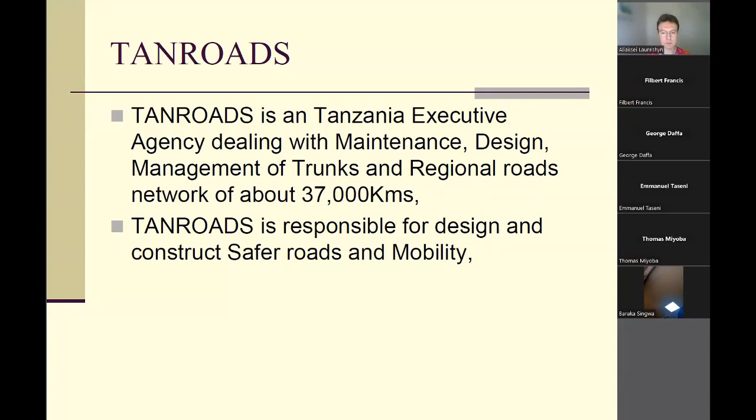Road safety manuals and guidelines that we are using for undertaking the audit in Tanzania: one is a guide to road safety audit established by the Ministry of Infrastructure Development in 2009. The second is the document established by African Development Bank manuals for road safety audit, established in 2014.

The AfDB manuals: one is for new road projects, which covers road safety audit stages 1, 2, and 3. The second document is for existing roads, proactive approach, conducted before crashes accumulate. The third one is for existing roads, reactive approach, identification and treatment of hazardous areas.

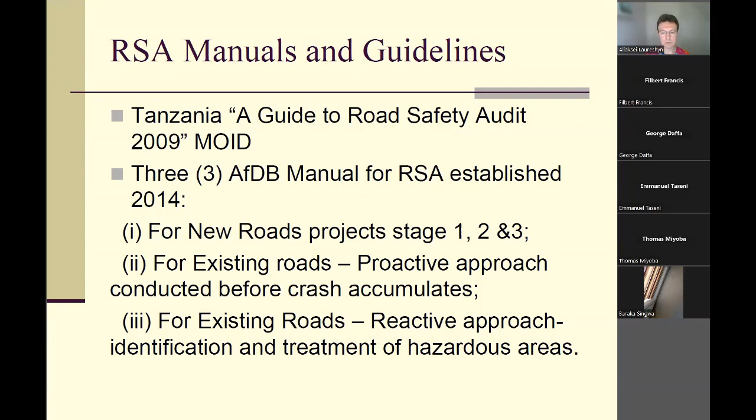Launch of road safety audit in Tanzania: the Ministry of Infrastructure Development prepared a guide to road safety audit. This document was developed after consultation with TANROADS. The Ministry instructed the road authority in June 2009 to conduct mandatory audit of all major road projects as per the guide to road safety audit.

The budget for undertaking implementation of road safety activities allocated in TANROADS is about Tanzania shillings 2.55 billion per year, distributed across all 26 regions. In Tanzania, we have 26 regions, and each region has a regional manager to control the network of trunk and regional roads in its area.

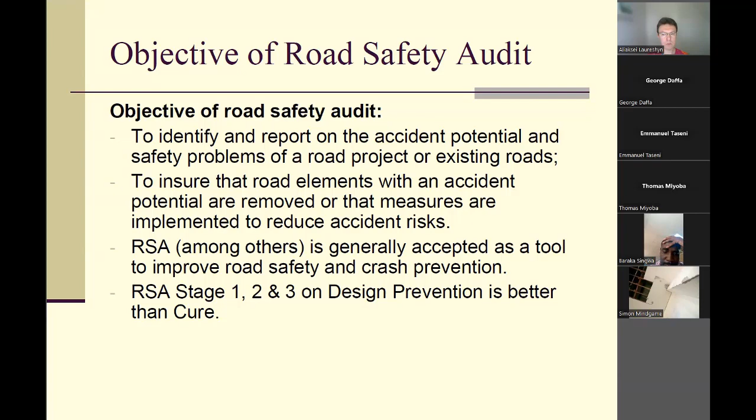Road safety audit stages 1, 2, and 3 are based on the principle that prevention is better than cure. These stages mean you are doing the audit on the design drawings, changing the lines in the drawing before construction starts. It's much easier to change a line in a drawing than to demolish an already constructed road.

Stages we conduct for road safety audit: according to the guide to road safety audit, there are 6 stages. Stage 1 is during the feasibility study stage, the first stage where we do the audit.

Stage 2 is during the preliminary design stage, where you check the drawing, the road signs, the junctions, the roundabouts, every component that is in the drawing.

Stage 3 is the road safety audit during the detailed design stage. At this stage, all road signs, road marking schedules, and bus bays are shown in the drawing, and you have to check if everything is okay.

Road safety audit stage 4 is on road works. During road works, a lot of accidents happen, so you have to go to the construction site to check if the contractor adhered to safety measures, ensuring temporary road signs and other information signs are in place.

Stage 5 is the pre-opening stage. At this point, road construction is completed, road signs and markings are in place, but the road is not yet open to traffic. That's why it's known as pre-opening, the road is completed but traffic is not yet using it, and that's when you do the audit stage 5.

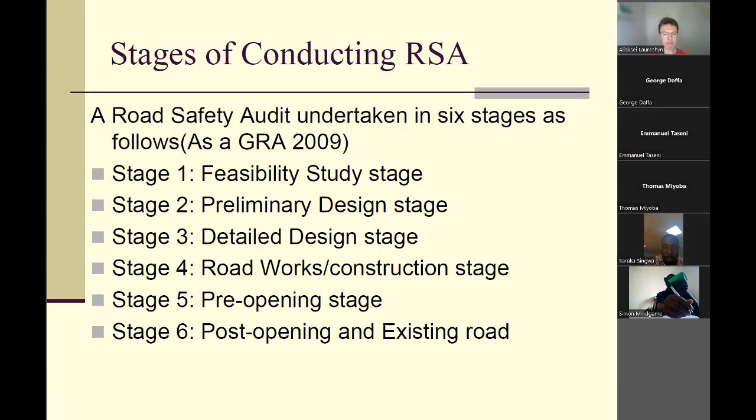Method that we are using in undertaking the road safety audit. We, as the road agency, have three methods that we are using in undertaking the audit.

The first method, we use the in-house capacity. If there is no enough money, we just coordinate ourselves, taking one road safety engineer, one design engineer, one maintenance engineer to do the audit in-house because there is no money to hire an independent consultant. But this method has got a conflict of interest because we are the client. If you are the client, you own the roads and you are doing the audit. So this method, although it's cheaper, has got a conflict of interest.

The second method that we are using is to hire an independent consultant. It needs a larger budget, it's expensive, and it takes time to procure the consultant, so you have to do procurement to get the consultant. Mainly for all donor-funded projects, AfDB projects and World Bank projects, we have to hire the independent consultant to ensure that there is no conflict of interest.

The third method that we are using is to put in the terms of reference that the designer for the road include a road safety engineer in his team to do the audit. So the client may include road safety audit in the contract of the designer, at road safety stages 1, 2, and 3. This is cheaper and faster, but also has a conflict of interest because the designer is the one who makes the drawings, so if he is the one auditing his own drawings, that creates a conflict of interest.

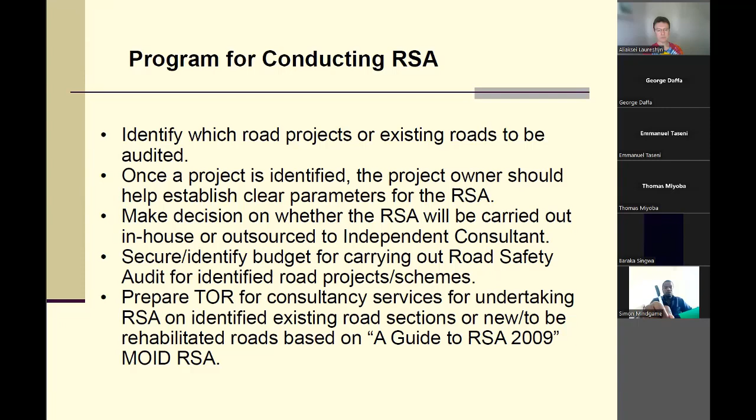While road safety audit is necessary, compliance with design standards does not guarantee safety. You can see a road which is very straight, 10 kilometers, but accidents always happen there. What is the problem? The radius of curvature is okay, every highway component geometry is good and it complies with the design, but accidents always happen. That's why I say that compliance with design standard does not guarantee safety.

Road safety audit helps sensitize highway engineers to safety issues. Feedback from road safety audit may lead to improved design standards. So if a highway engineer designs a very straight road, he may say this is geometrically okay. So sometimes the highway engineer, you have to teach them how to do the audit.

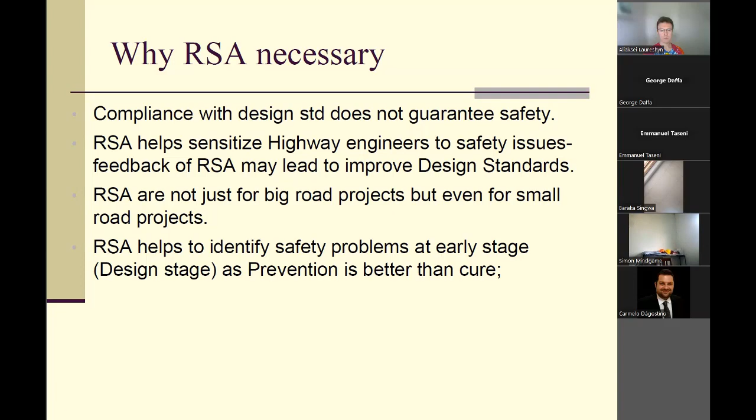Road safety audit is not just for big roads, but also for very short, small road projects, especially in urban areas. Maybe there is just a 4-kilometer road, but accidents happen every day, so you have to do the audit to check what the problem is. Road safety audit also helps you identify safety problems at an early stage, at the design stage, as prevention is better than cure.

Involved parties on road safety audit. The parties involved in the road safety audit are the audit team - an in-house audit team or independent consultant composed of safety specialists commissioned by the client.

The second party is the designer, the design team, which is the party responsible for the design and will be asked to alter the design to incorporate the recommendations.

The third party is the client. The client is the owner, like TANROADS, the owner of the road who gives consultant services to the audit team. So we have these three parties, and the client is the one who decides to accept or reject your audit recommendations.

Next, undertaking the audit. Team members study the project during the undertaking of the audit. Each member studies the project reports and drawings independently, then comes together for a site visit for road safety audit stage 1, 2, and 3.

If this road safety audit is at the design stage, you may have three roles: the highway engineer, road safety engineer, and maintenance engineer. Everyone should review the drawings independently, then visit the site to see what the problems are.

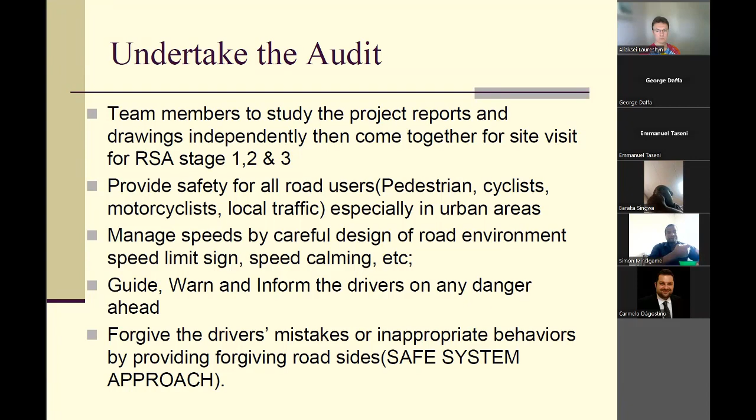Forgive the driver's mistake - drivers always make mistakes, but you have to design so that even if an accident happens, the impact will be very low. You have to consider forgiving drivers' mistakes or inappropriate behavior by providing forgiving roadsides, or use the safe system approach.

Next, road safety audit reporting and documentation - a checklist for audit reports. In the reporting, you put the introduction details of who requested the audit, and you have to show in the report the names of the persons in the audit team, mentioning their names and each profession.

Drawings and documents submitted - you also have to list the type of documents that have been provided for review. Constraints - if there are any constraints, you have to mention in the report, for example if there are no signing plans available, maybe one document was missing during the execution of the audit.

When the audit was done, you have to put the dates and times of the site visit. Sometimes you have to visit the site during the night because maybe an accident in that area happened at night, so you go to check what the problem is, maybe visibility problems.

Date of meetings - if meetings are held with the client and designer, you have to mention the dates and attach the attendance register of those who attended. The technical terms used in the report also have to be shown.

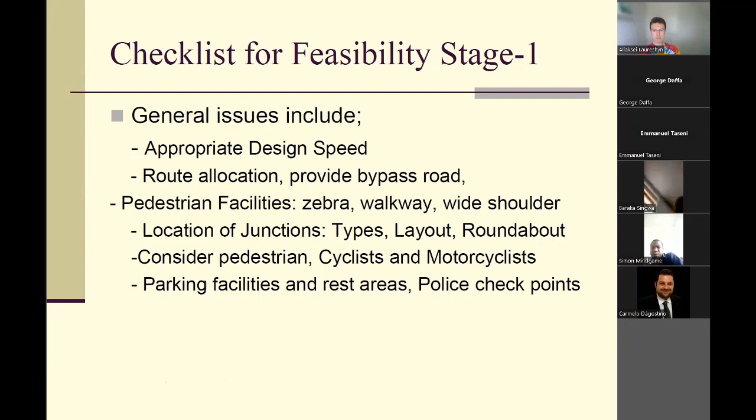Next, checklist during road safety audit stage 2, preliminary design. What factors are we checking? These issues: appropriate design speed, stopping sight distance, roadside features, drainage.

You have to check the bus bay, side slopes, horizontal alignment, horizontal and vertical curves, and consider visibility, the new-existing road interface.

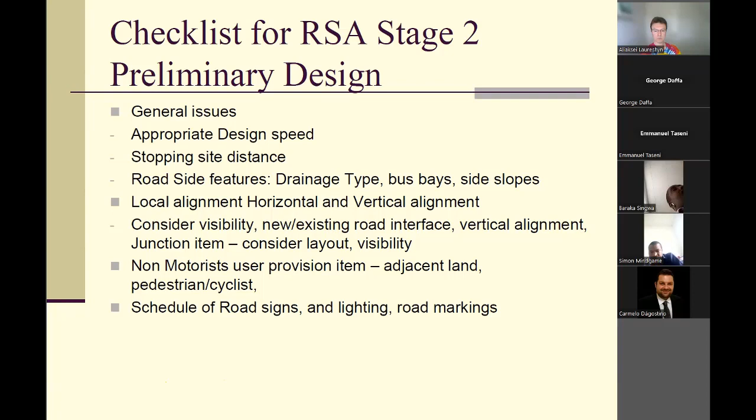Check junctions, non-motorized user provisions like pedestrians and cyclists, and check the schedule of road signs, lighting, and road markings.

Next, checklist for road safety audit stage 3, detailed design. You have to check what we are checking during the detailed design.

The factors include appropriate design speed, pedestrian facilities, roadside features, drainage, schedule of road signs, traffic signals, markings, horizontal alignment, visibility, junctions, safety, guardrails, and roundabouts. These are the factors checked during the detailed design.

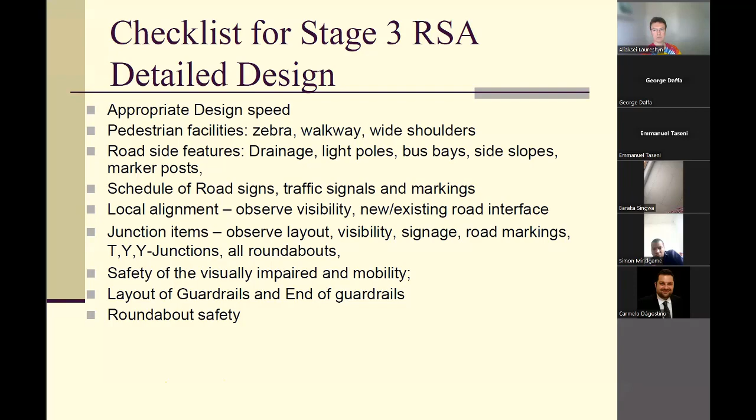Design safer junctions. During the audit of the design, you have to check these issues. No crossing roads: if you put crossing roads, you increase the conflict points to 32. Good approach visibility: this visibility is very important in junctions. Speed of vehicles is controlled: when vehicles are approaching the junction, you have to reduce the speed.

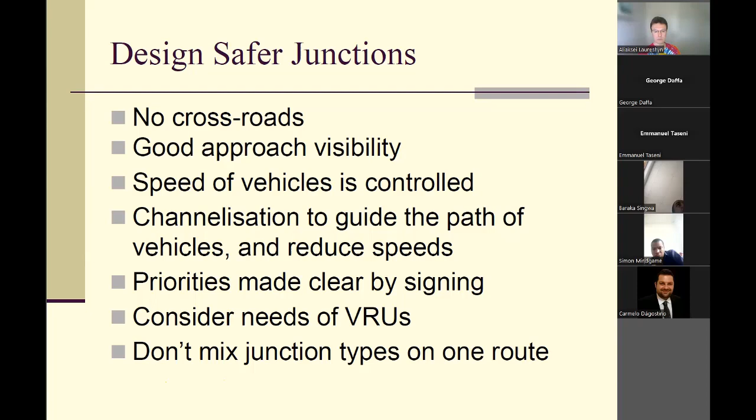Channelization is needed to guide the path of vehicles and reduce speeds. Priorities made clear by signing. Consider the needs of vulnerable road users. Don't mix junction types on one route. Next.

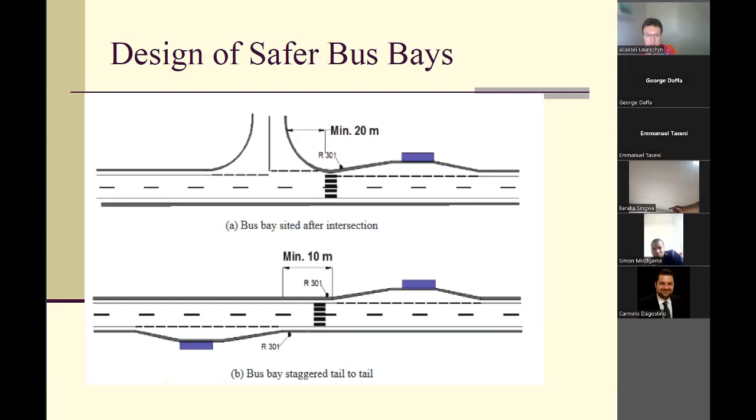This is one of the checks for the design of safer bus bays. When you introduce a bus bay at a T junction, you have to put it after the junction in order to increase the visibility of oncoming vehicles for the driver from the minor road. Also, the bus bays should be staggered tail to tail, as you can see in the next figure, and a zebra crossing should be put in between in order to increase the visibility of pedestrians who want to cross the road to see the oncoming vehicles. Next.

Design safer junctions. Also, you have to stagger the junctions. If you put a cross junction, as you can see there, there are 32 conflict points. If you make it staggered, you put two T junctions instead of a crossing. One T will have 9 conflict points, and the other T will have 9 conflict points. So it will reduce the conflict points from 32 to 18.

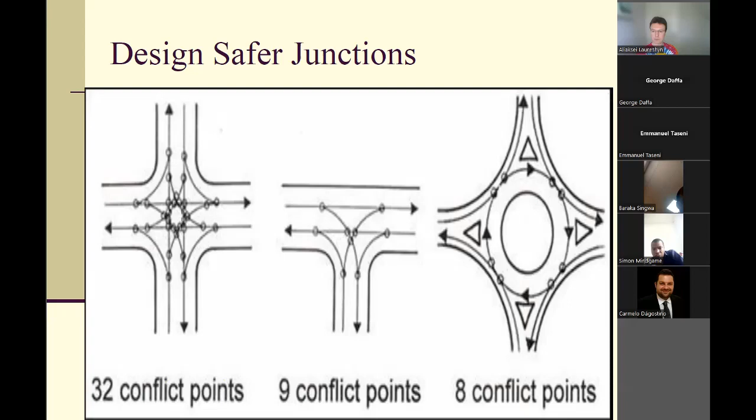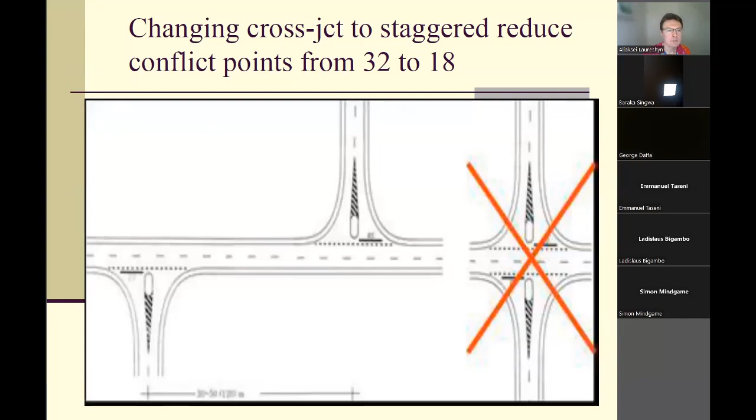And if you put a roundabout instead of a cross junction, you reduce the conflict points from 32 to 8. That will increase safety. Next. This is staggered junctions. If you stagger the cross junction, you reduce the conflict points from 32 to 18. Next.

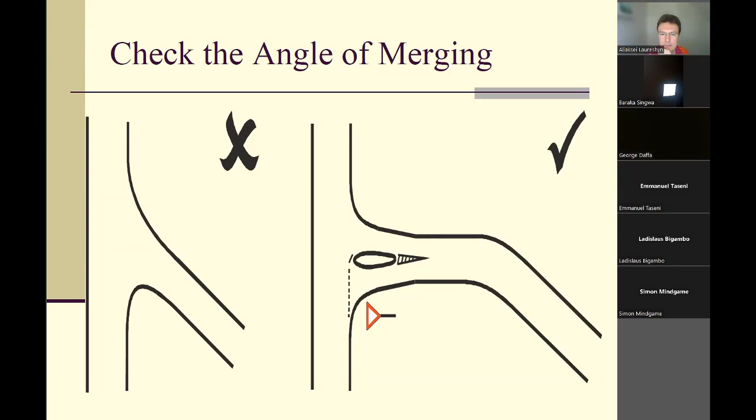Also, you have to check the angle of merging on major roads. You shouldn't provide a Y junction, because visibility of the oncoming vehicles from the minor roads will be very poor. So you have to make sure that you enter the main road in a T at a 90 degree angle. Next.

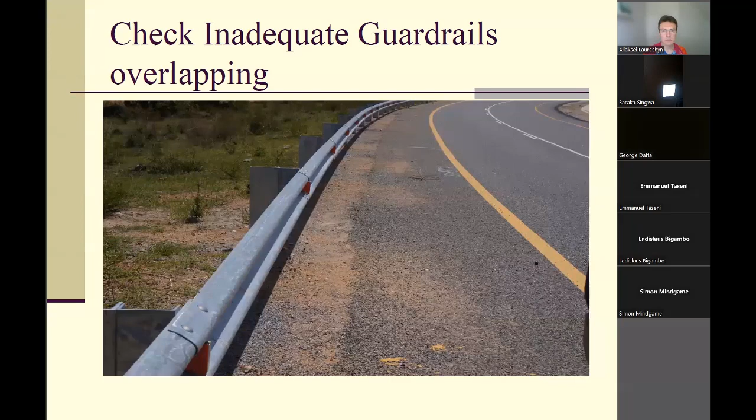During the audit of an existing road, you have to check the direction of the guardrails. As you can see here, the vehicles are going this way, but the overlapping of this guardrail is the reverse. If you allow guardrail overlapping like this, it will bring problems to road users if they hit that guardrail. Next.

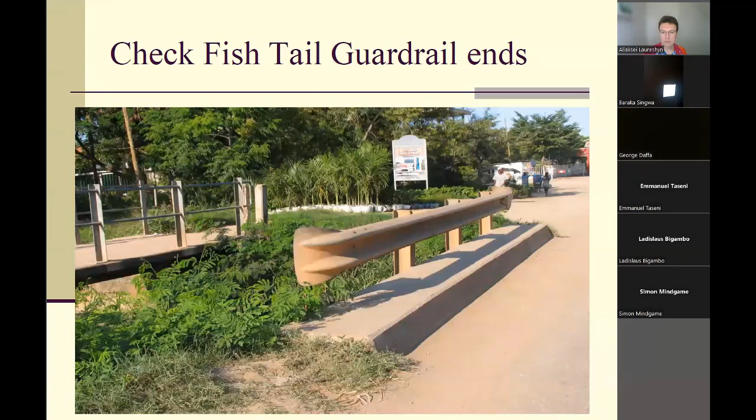Also, you have to check the fishtail guardrail ends; you have to put them in the soil. But if you put it like this, when you crash with your vehicle, it will cut you. Next. These are the consequences of putting a guardrail like that. So you have to ensure that the overlapping of the guardrail is proper. Next.

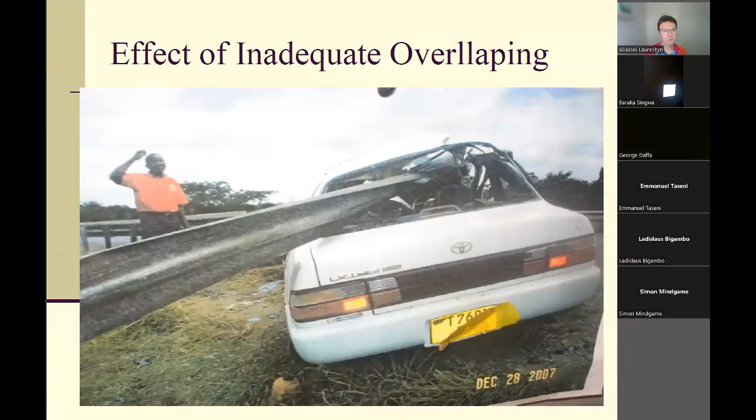Also, during the audit, you have to check the drainage structures, as stated in the checklist. In an area like this, many drunk people fall into the ditch here. So you have to put at least a guardrail to protect pedestrians from falling into the ditch. Next.

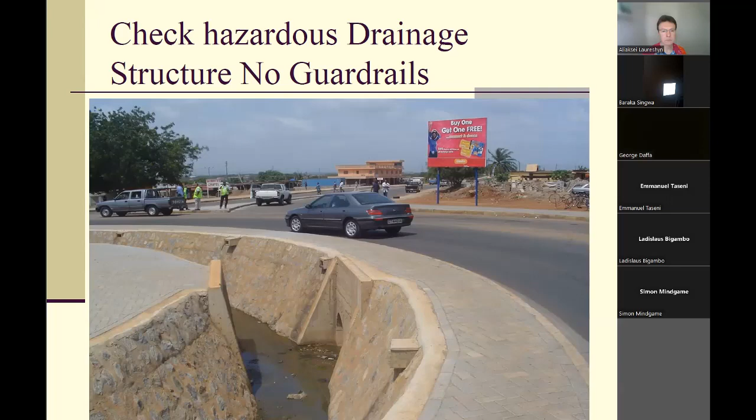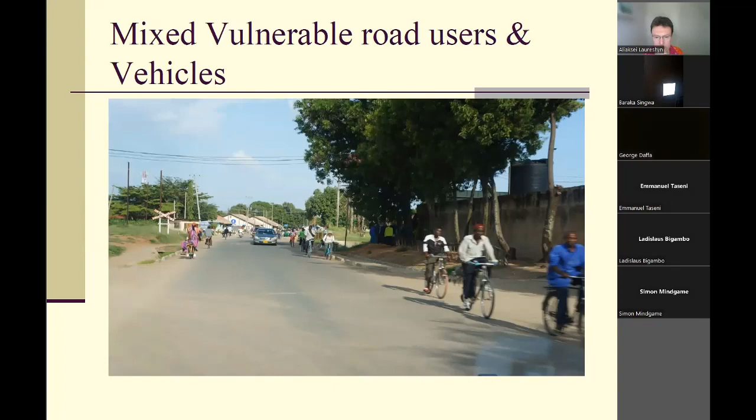Also, on roads, you have to provide cycle paths and walkways for vulnerable road users in order to reduce the conflict between cyclists and vehicles. Next. Also, here we provided the walkways, as you can see. Next.

On highways, which are high-speed roads, we put acoustic road markings on the edge line. As you can see, there is a gap between the lines, so if vehicles run on it, it makes a sound. If the driver sleeps and goes outside the road and drives on it, it makes a sound, so the driver will wake up and come back to the carriageway. Next.

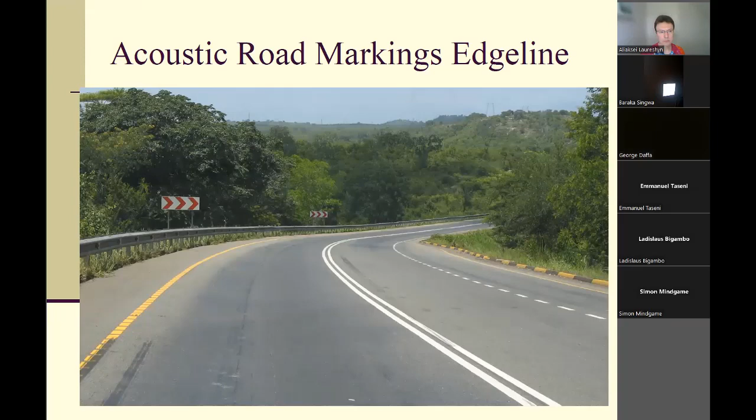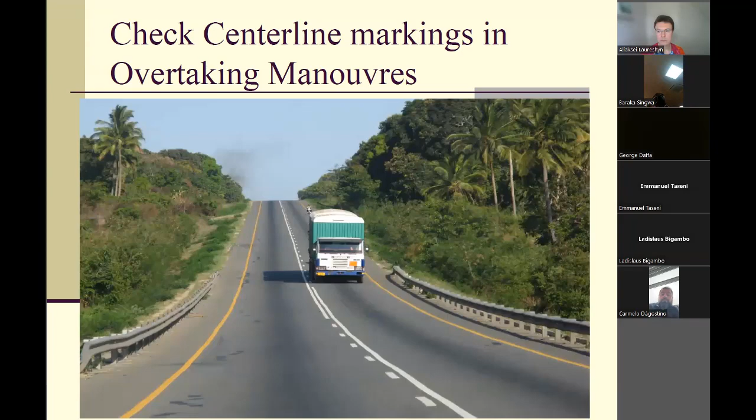Also, we put the center line marking to control overtaking, depending on the visibility of the road. If we are climbing, we put a solid line to stop you overtaking. But if you come down and the visibility is clear, we allow you to overtake. Next.

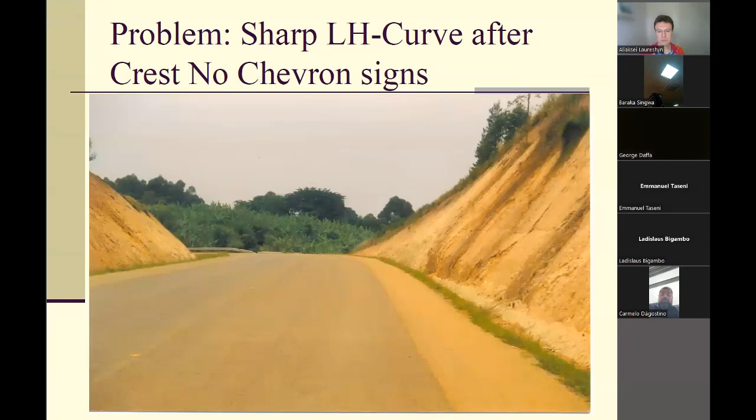In a situation like this, there is a vertical curve, and then a left-hand horizontal curve immediately after the crest. This is very dangerous. So you have to put chevron signs in order to alert drivers that there is a sharp horizontal curve. Next.

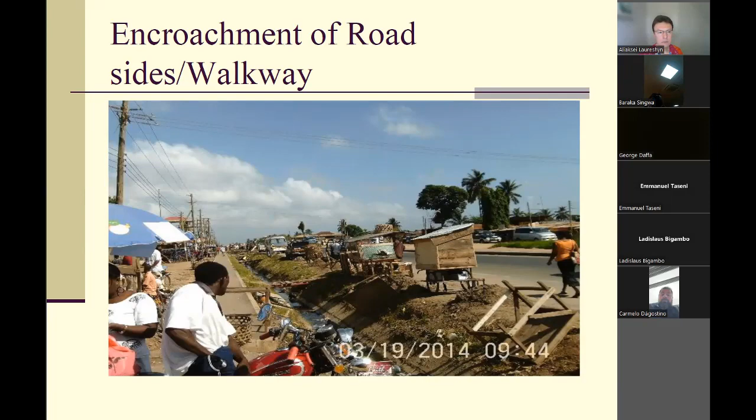Also, inappropriate drainage structure. You can see there a big drainage, and also the lack of a pedestrian slab to cross the ditch. So they put their own slab there using timber, so that there are crossings. So you have to provide them. Next.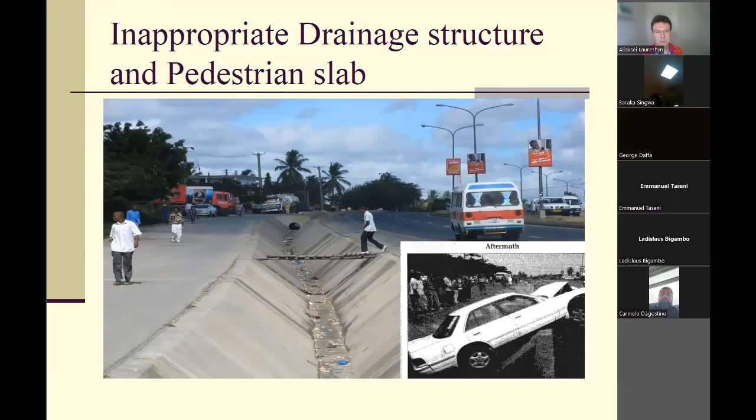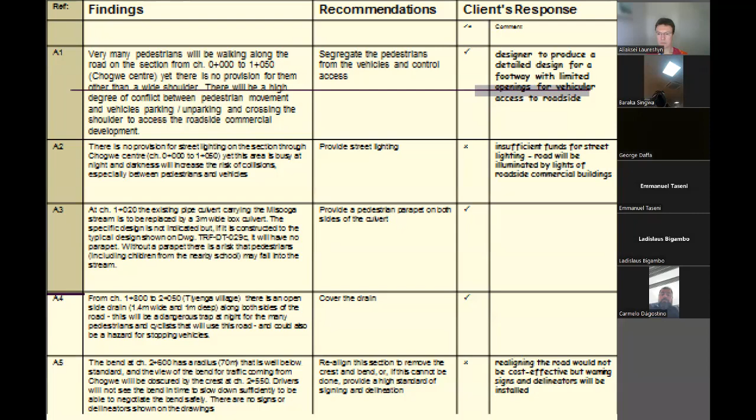This part is how we are reporting the road safety audit. We put it in a tabular form in order to simplify how to check the findings, reference number, recommendation, and the client response. The first column is the reference. The second column is the findings. The third column is the recommendation of the audit team, and the fourth column is the client response. He has to respond on the issues. Next.